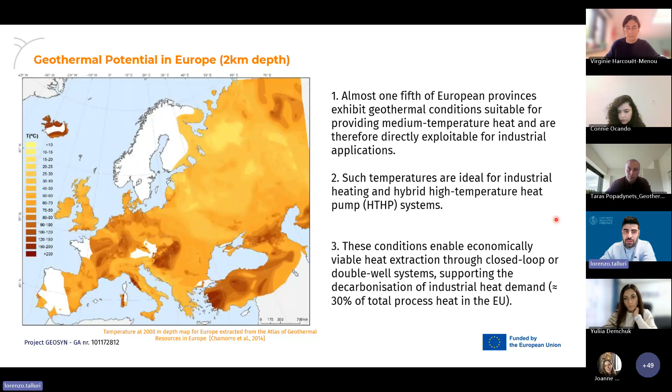Such as high temperature heat pumps - this kind of solution could be economically viable if coupled with new technologies for geothermal exploitation. So we can estimate that industrial demand could partly be satisfied by this kind of solution, and there is lots of industrial potential that could be exploited.

We can see in the literature lots of works, like the ones from Wolf and Blesch or Kosmadakis and Marina, that estimate the petajoules of energy consumption from thermal processes lower than 100 degrees Celsius, or in the range between 100 and 200 degrees Celsius, which are the ones that could be directly sourced by geothermal energy or upgraded thanks to a high temperature heat pump.

Indeed, there could be a nice sector coupling between geothermal energy and industrial processes. Particularly, there are lots of industries such as paper, food and beverages, and chemicals that require temperatures between 80 to 200 degrees Celsius. This could allow the utilization of high temperature heat pumps or normal heat pumps as a key technology for enabling next generation and fossil fuel decarbonization.

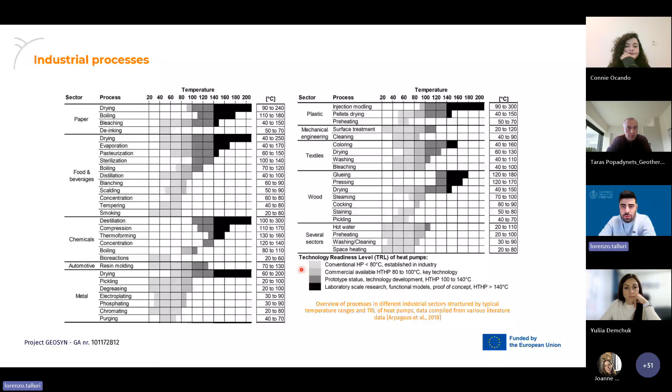This is what we want to try to solve, or at least to think about, in the GeoSyn project. The GeoSyn project's aim is to develop an integrated solution that harnesses geothermal energy. Particularly, we have a geothermal source at about 120 degrees Celsius and upgrade it with a high temperature heat pump, and also provide cooling for chilling at about 12 degrees Celsius.

Indeed, in lots of industrial applications there is a need for both heat for thermal processes and cold. For example, in the agri-food sector, the requirement for both heat and cold is very widespread.

As UniFi, we are the scientific coordinator of the project and work package leader for the thermal design of the system, and we are trying to coordinate this innovation within GeoSyn. What we have proposed are two technologies that could either work singularly or simultaneously in order to increase the use of the cascade energy of geothermal energy.

GeoSyn project partners are APRE, Geothermal Ukraine, COSVIG, University of Florence, Ribacol, NeoEco, SDU, and SINTEF. This small consortium is very goal-oriented in order to provide an effective solution.

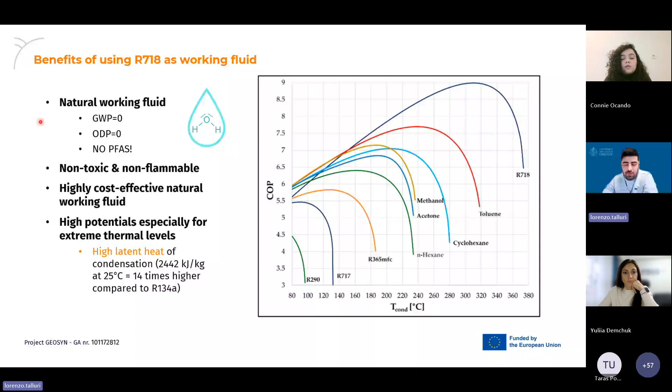Moreover, it has very high potential because, for example, the latent heat of condensation at 25 degrees Celsius is 14 times higher compared to R134A.

Obviously, not all that sparkles is gold, and there are some issues with water, specifically the high specific heat ratio, the very high specific volume of steam, and the normal boiling point of 100 degrees Celsius. These characteristics bring issues that need to be solved: high discharge temperature at the compressor exit, high volumetric flow rates, and compression ratios, especially if we go with a temperature at the evaporator lower than 100 degrees Celsius, which means going into subatmospheric conditions.

So what we needed was to try to have a flexible configuration where we have at the evaporator a temperature of about 120 degrees Celsius, and indeed we have steam entering the cheese factory, which is our case study, at about 130 degrees Celsius. We have already placed a monitoring system at the demo site, so we know the conditions of temperature and pressure.

The goal was to develop a heat pump with a condenser duty of 50 kilowatts, a temperature lift of at least 80 Kelvin, and a supply steam temperature of at least 180-200 degrees Celsius.

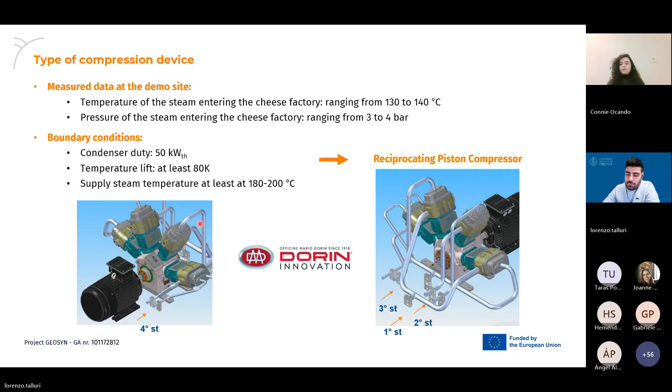And then the solution implemented: there will be a high temperature heat pump with 4 stages. We have the condenser, internal heat exchangers, and the evaporator. We also have a receiver for the flexibility of the system.

We can see that with this solution, we could reach, at least theoretically, a coefficient of performance, with a temperature lift of 80 Kelvin from 120 to 200 degrees Celsius, of 3.6, which is well above the target we set during the proposal writing.

This is just one piece of GeoSyn. The other piece is about the ejector cycle, which is still innovative and still uses water as working fluid. We provided thermodynamic modeling with several configurations and also a computational fluid dynamic analysis for the ejector that we will be designing and building completely anew for the GeoSyn project.

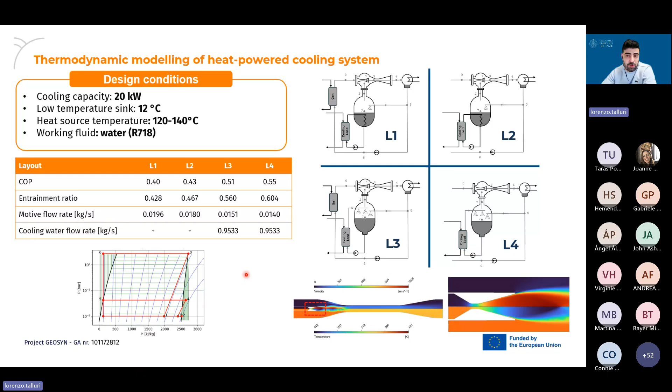Thanks to the calculation of this kind of plant, we will implement this solution: an evaporator where there will be direct injection of the water.

There are two cycles, let's say a motor cycle, where the water is converted into steam and then provided to the ejector, and then the refrigeration cycle, where the cooled part will go to the case studies, basically speaking.

So we have this kind of cycle, one close to a motor cycle and one a refrigeration cycle. The effective coefficient of performance of this solution is about 0.5, which is quite good if we think about heat-powered refrigeration systems.

And then we have the case studies. We've got a real case study, the San Martino dairy factory, which is very close to the Enel Green Power plant, Nuova San Martino. We have a steam pipeline that provides heat directly to the cheese factory.

We will be able to upgrade this heat and downgrade it to cooling requirements through the innovative GeoSyn solutions. Furthermore, thanks to the work of the whole consortium, we also found several case studies where the application of the high temperature heat pump, but also the cooling system, could be exploited, like in food and beverage, pulp and paper, and textile industries, and we can see the level of heat temperature required that could be covered by the GeoSyn solution.

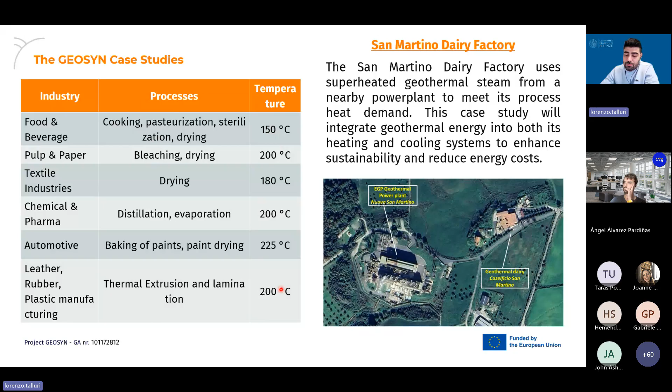So I want to draw my conclusions. Particularly, GeoSyn tries to demonstrate the viability of medium-grade geothermal heat in order to provide both heating and cooling for industry.

The innovative part is the utilization of R718 water as working fluid, both for the high temperature heat pump and for the cooling cycle, which are totally heat-driven. Both technologies are showing potential for coupling with the industrial sector and are especially effective where concurrent heating and cooling are present.

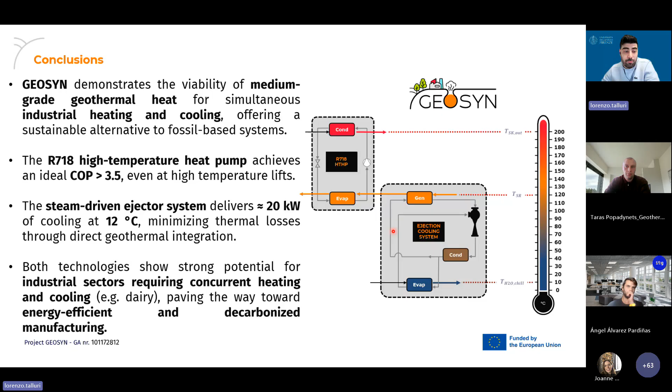So, paving the way to an energy efficient and decarbonized manufacturing.

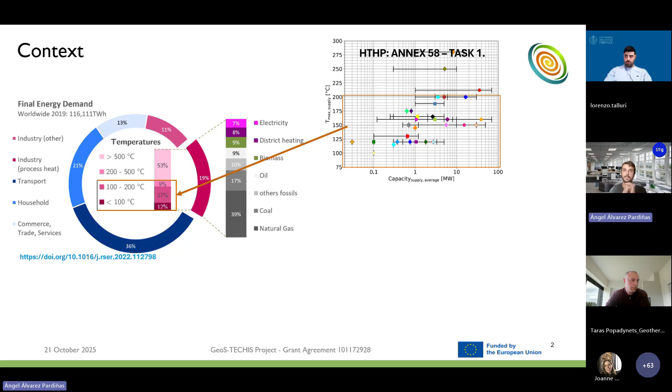And as already discussed today, high temperature heat pumps appear and are developing as a very promising technology to meet these thermal demands at temperatures below 200 degrees Celsius. There are already systems in the market, and it's a very much developing technology these days. However, to make these heat pumps for industrial processes as efficient as possible, we need a heat source that is reliable but also at sufficient temperature.

And geothermal resources in the range of, let's say, 100 degrees Celsius could make a good opportunity for this, and they could be more widespread than the conventional uses of geothermal energy for electricity production nowadays. And this is the context that powers GeoS-TECHIS. GeoS-TECHIS is an EU-funded project with the focus of decarbonizing industrial thermal processes with geothermal energy and other technologies that have been or are being developed around geothermal energy. We are 10 partners plus one affiliated, spread all around Europe and working collaboratively in this project.

So basically, the general picture is not very different from Geosyn, in that we are building on this binomial of geothermal energy at the low-medium temperature range, around 100 degrees Celsius, and developing technologies to meet heating and cooling for industrial demands. Of course, to bridge this gap, there has to be a thermal system that we will introduce later, and other technologies which allow us to take the most out of this binomial of geothermal energy and the demands we are trying to meet.

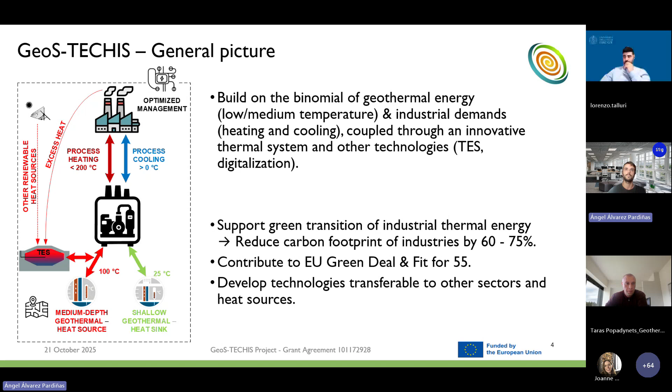So please let me now introduce the 5 specific objectives and innovations within GeoS-TECHIS, which we will delve into later in other presentations, but I will try to introduce them today. First of all, we have what we call the GeoS-TECHIS thermal system. It is the technology that will allow us to bridge the gap between the geothermal heat source we are aiming at, those 100 degrees Celsius, and the process heating at around 200 degrees Celsius and cooling above 0 degrees Celsius we want to meet.

For this, we have a specific presentation today in session 2, which will be given by my colleague Christoph Vanasiak from SINTEF Energy. I really hope you will be present there, and he will introduce the technology further. But the idea is that we will have a system which integrates 2 solutions based on natural refrigerants: a water R718 high temperature heat pump plus a propane ejector cycle, utilizing the low grade heat to produce cooling.

The second of the objectives and innovations within GeoS-TECHIS is to push the limits that currently exist for thermal energy systems, storage systems, and underground thermal energy storage in a way that we can push them further in temperature. Currently, they are basically limited to 90 degrees Celsius or so, according to the literature. We want to bring our contribution to make them more suitable for industrial flexibility.

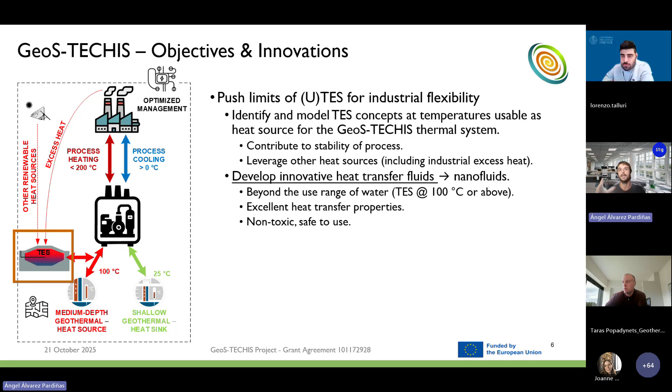It's very interesting to have the right technologies in place, but of course, it's also important to manage them in a right way. And to do so, we are working in a specific work package on supporting the decarbonization of industrial heating and cooling through digitalization and digital tools and technologies. And we are doing it in two different branches. One of them is to optimize energy management.

And we optimize energy management with the development of an industrial Internet of Things platform coupled with hybrid digital twins, which allows us to visualize, store, and operate according to the data we are retrieving from the industry. So we are retrieving those data, we are able to make predictions and forecasts of how the system should work in order to make the optimal use of energy we have available in our system.

And the other line we are working in is to make the knowledge we are getting from the project usable for other industries, providing what we call the decarbonization potential evaluation tool. So in principle, any industrial user could bring us their data, and we encourage you to do it actually, data on their demands, temperature profiles, when this happens, where they are located, which are the current systems they have, so that we can use this data in our decarbonization potential evaluation tool and provide what we call decarbonization roadmaps or decarbonization strategies.

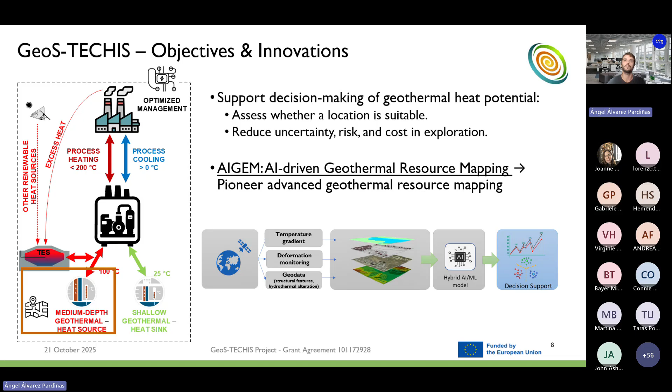And last but not least, the fifth of our objectives. There are a lot of misconceptions around geothermal energy and geothermal supported energy systems, and GeoS-TECHIS is trying to promote the knowledge and acceptability of these systems. First, by properly assessing the environmental and societal impacts they actually have.

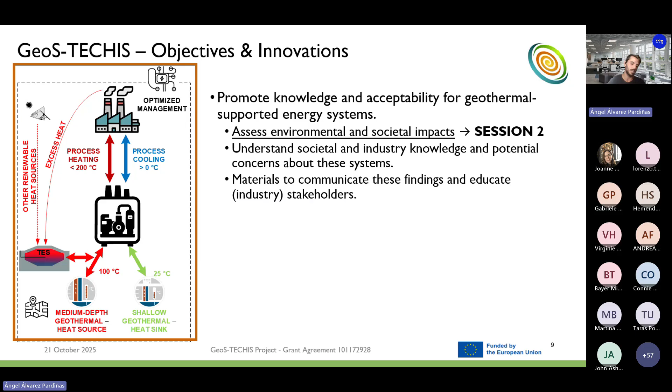And we have in session 2 today a presentation which will be held by our colleagues in Leitat, in Catalonia, Spain, around this topic. So I will not disclose too much right now, but the idea is to be able to actually assess what is happening in this kind of systems, to understand also the actual knowledge of society and industry on the potential of these systems. And in the end, we will provide in GeoS-TECHIS materials to communicate our findings and educate industry or stakeholders around the topic.

And last, I would like to introduce the company which is our partner and which makes everything possible in the end. It's allowing us to validate all these technologies and developments: Kauman, a partner of our project. They manufacture conveyor belts and power transmission belts. They are located in Galicia, in northwest Spain, above Portugal. And it's the perfect example of industry combining heating and cooling demands at the temperature levels we are aiming at here at GeoS-TECHIS.

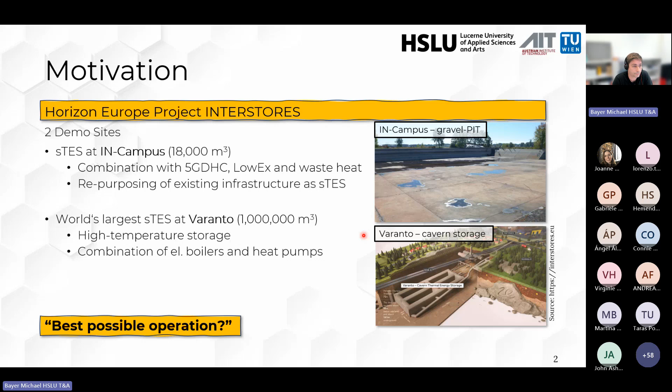One aspect for us at HSLU was the development of a reduced order model in Modelica, which is both fast and accurate, so it can be used for system simulations in a real environment. The issue was that we don't have measurement data yet, so we had to come up with a process to create this ROM. Therefore, we used a validated COMSOL model created by AIT, one of the project partners. It's rather detailed and quite computationally intensive, and therefore impractical for real-time system simulation. To address this, we created the reduced order model in Modelica.

So how did we proceed? We defined similar input parameters and boundary conditions, which were fed into the COMSOL Multiphysics model, which then created results. In parallel, we created the reduced order model in Modelica and did the calibration process in order to match the results from COMSOL and have something fast, which is suitable for digital twinning.

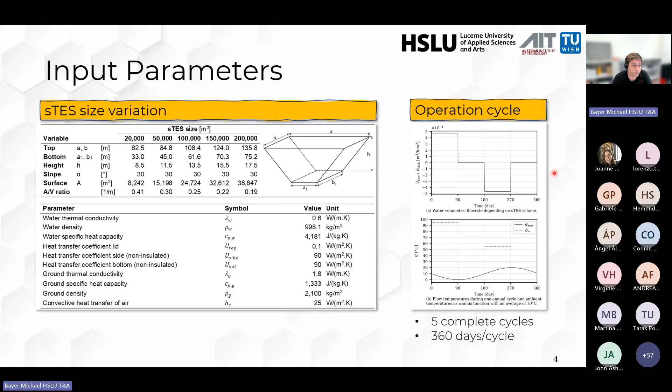This is the reduced order model we created within Modelica. It mainly consists of 3 components: the stratified tank model, the buoyancy model, and the ground model. Both the stratified tank and the buoyancy model were based on the Buildings library, and we made strong modifications, first to represent the proper shapes, in this study the truncated pyramid, but the model can represent cones, pyramids, cylinders, basically all kinds of shapes.

We used equidistant discretization. For the study, we used 200 layers within the tank, and you're able to connect basically each layer of the tank with inflow and outflow connections. Then for the ground model, we created a 2D grid with the finite volume method, where each element is represented by a 4R1C network to simulate the interactions between the ground and the tank.

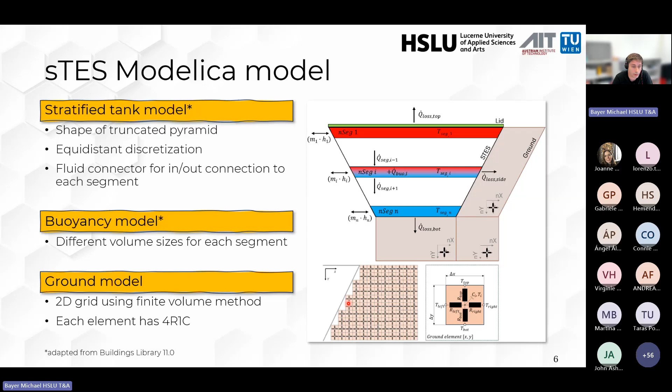For large tanks, the side losses are roughly 50% of the total losses, and for smaller tanks those increase up to 66% due to the higher surface to volume ratio. Bottom losses in total are the smallest contribution, overall ranging between 7 and 9% of the total losses. Even though we have slight disagreements, the overall alignment between the Modelica model and the COMSOL results stays in an acceptable range, somewhere between 1% and minus 2.5%.

Here you can see the temperature profiles for the different sizes from 20,000 to 200,000, representing 5 relative heights within the storage. So 95% is the layer close to the lid, and 5% represents close to the bottom of the storage. You can see quite close alignment, especially during constant conditions, but as soon as dynamic events occur, the temperature profiles from the 2 models show minor deviations.

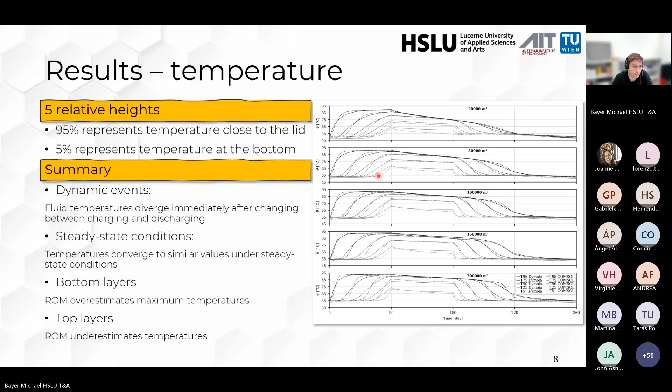Although there is still slight room for improvement, for example, in extreme cases when the tank is very small or very big. What's also to mention here, the best performer is the 100,000 cubic meter storage, but this is because we started with this one and all the calibration and validation was done with it, and then we scaled it up and scaled it down.

If we take a look at the energy balance, you can see that the Modelica model consistently underestimates both the charged and the discharged energy compared to COMSOL by roughly 5%. But this is also mainly due to temperature evaluation inside the tank. Smaller storages have a higher surface to volume ratio, and in these cases, the thermal losses are more dominant and the stratification is less important.

But larger systems have stronger thermal gradients and stronger stratification, especially near the inlets and the tank bottom. The COMSOL model captures those behaviors by using a fine mesh and fully coupled physics. But the reduced order model employs a simplified layer-based structure and buoyancy treatment. So as a result, small temperature mismatches can accumulate into more noticeable deviations as the simulation time gets longer.

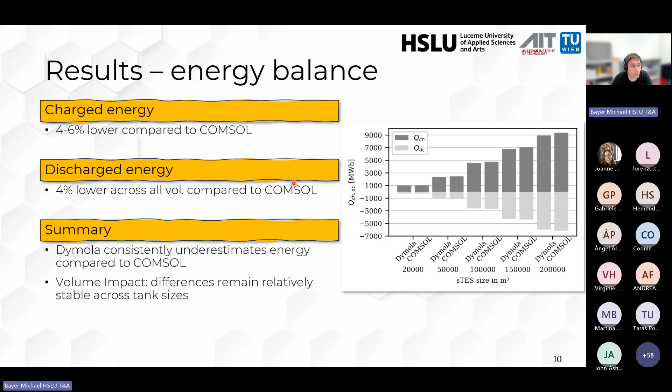For the computational time, you can see the comparison between Dymola and COMSOL. We optimized the reduced order model by calibrating the segment count based on convergence tests to ensure a stable stratification without excessive runtime. In COMSOL Multiphysics, there is a direct fully coupled approach with adaptive mesh refinement and use of the MUMPS solver.

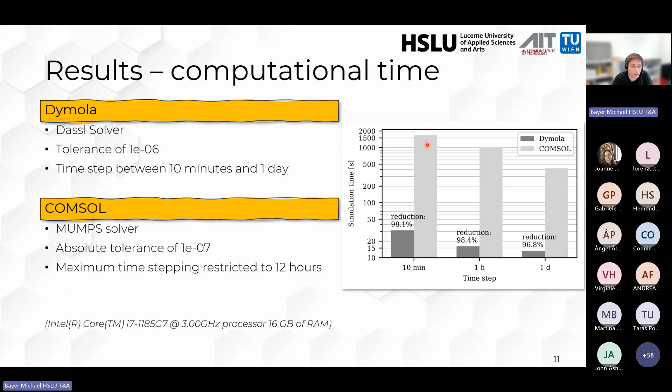And in Dymola, we used the DASSL solver, and we ranged time steps between 10 minutes and 1 day. For both, we used the same machine, and we were able to reduce the simulation time by up to 98%.

Which already brings me to the conclusion. The reduced order model has demonstrated strong performance, achieving deviations of less than 2% in temperature simulation. During the calibration against COMSOL simulation, the model was highly efficient, and we were able to complete a full year simulation in roughly 4 seconds. If we simulate something like Dronninglund, which is highly complex, then it increases, but for an annual simulation of Dronninglund we still manage with roughly 1 minute simulation time.

What are we now planning to do? First of all, we already did the FMU export, and we are about to perform some parameter calibration with FMPy. Additionally, we will work on different storage media, for example, the gravel water mix. Also ongoing is model refactoring, so we can make it accessible to other people and more usable. The ultimate goal is to implement this in an MPC and install it on one or both of the demo sites once they start operating.

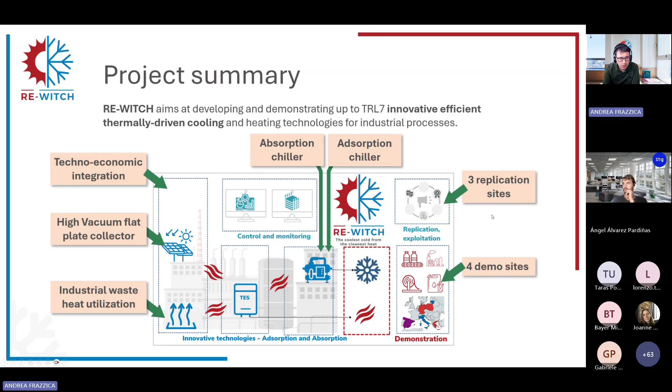So we have 3 different technologies working in parallel in this development phase that will be able to provide cooling to different industrial applications. More specifically, we'll have 4 demo sites covering different industrial processes, from the most standard ones, usually food and beverage, up to innovative industrial processes, at least from the cooling point of view, which are biorefineries and the pulp and paper sector. And we'll also further replicate this investigation through modeled demo sites in 3 different replication sites.

So, as mentioned, the core of the project is the development of innovative sorption processes for cooling applications. In particular, we have 3 different technologies currently under development. The first one is an innovative adsorption technology. Adsorption means that the sorption process happens thanks to the use of solid sorbent media, in this case silica gel. But the main innovation is related to the patented solution proposed by the German company Sorption Technologies, in which they try to reduce the number of components by having the adsorbent reactor integrated with the evaporator and condenser inside the reactor itself, minimizing the number of heat exchangers and exploiting direct evaporation and condensation inside the reactor.

And this solution is also conceived as stackable as possible. So in a modular way, you can see here, for example, a system consisting of 3 modules working in parallel. So you can, in principle, increase the cooling capacity that you want to install by stacking more modules together. The other 2 technologies belong to absorption. In this case, from the physical process, the main difference is that the absorbent material is a liquid solution. In our case, for both technologies, we are using lithium bromide solution as an absorber.

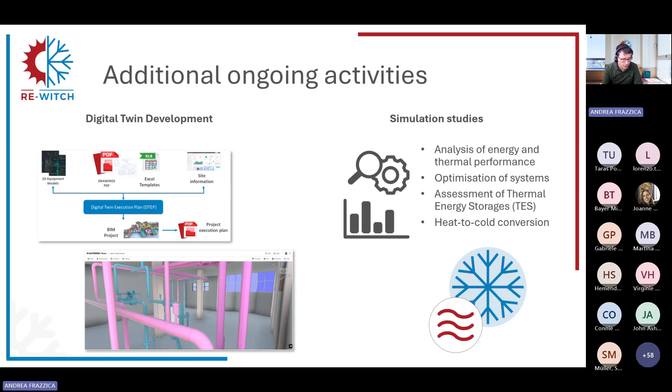And then we have two other plants belonging to industrial processes that are usually not so considered in cooling processes: a biomass and biofuel refinery in Greece, Miloil, and a pulp and paper company in Italy, ICP.

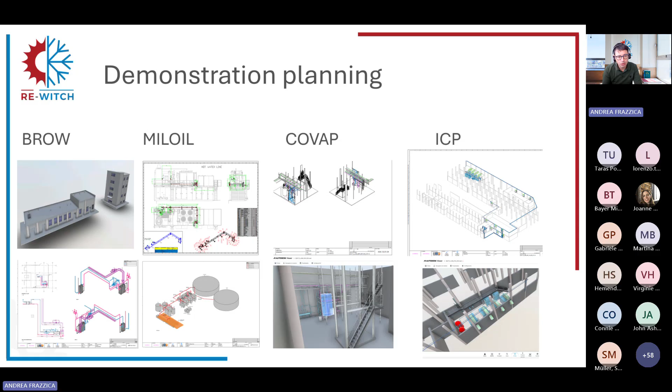Here's quickly an overview of the current status of the different digital twinning we are developing for the four demo sites. We are now working on the current configuration, trying to model all the sections of the plants interested by the ReWitch integration. Next steps will be to profit from this preliminary digital twinning to derive the designing phase of each demo site.

So what's next? As mentioned, we are now in the manufacturing phase of the first prototypes. This will be ready probably by the end of this year, and then early 2026 we will start the testing campaign in the lab infrastructures that are part of the project, in order to finalize the design and optimize the operation of the technologies.

We are now working on the cloud-based monitoring system that will be installed in all the demo sites to start the data collection for the baseline analysis, which will last for the entire 2026.

And as mentioned, we are finalizing the design of the demo sites. We expect to have the design finalized by the first months of 2026, to move on with procurement and installation of the equipment in all the demo sites until the end of 2026, in order to be ready to receive all the technologies on site and install them to start the final year of the project, which will be mostly dedicated to monitoring the technologies' operation.

As introduction, we will have a short look at thermal source networks in general. Afterwards, we will already dive into the specifics with a system description, and I also brought some examples about the envisaged operation, first monitoring results, and one exemplary planning step.

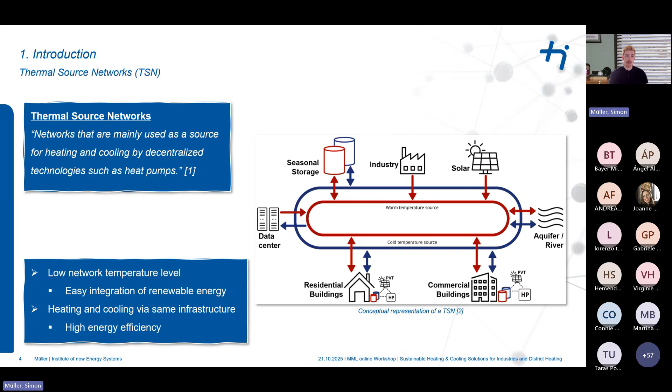With those two aspects of TSN, you can already see that they can help move to a more climate-friendly future. Today we're going to look at a system which can be seen in some parts as a modern benchmark of those TSNs, in terms of retrofitting industrial areas, multi-source and multi-storage integration, and modularity and adaptability.

The TSN I'm referring to is called the InCampus, and the InCampus is a planned 75-hectare industrial park, which will consist of up to 70 non-residential buildings. The area of this project is situated in Ingolstadt, Germany.

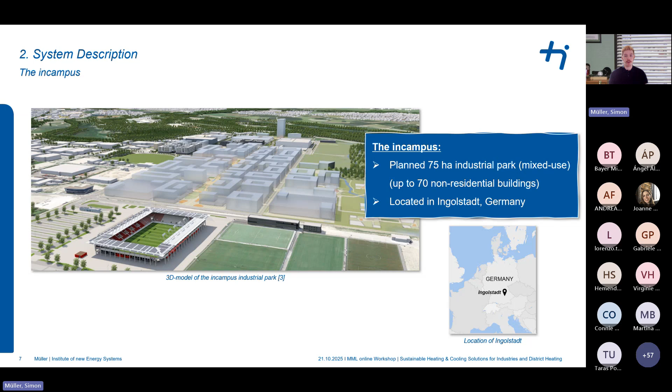But before I show you some recent information about the InCampus and the related energy system, I want to have a quick look back in time and see what was happening at the InCampus before.

Until 2008, the area we're talking about was occupied by a refinery, which started operation back in 1965, and sometime after the refinery shut down, the area was sold for €1 symbolic to the city of Ingolstadt and Audi, which is also located with its headquarters in Ingolstadt. Both partners agreed to a plan to refurbish the area into an open technology park, and now we can already see that path from the old refinery site towards this new TSN system called the InCampus.

All of that process started with a soil remediation process to get rid of all the contamination left from the operation of the refinery. 90% of the washed soil was again used on site, for example, for land leveling.

Next to that, there are also groundwater wells, which keep the remaining contaminants from being washed away, and those can also be used as a thermal source or sink for the TSN, which you will also see later on.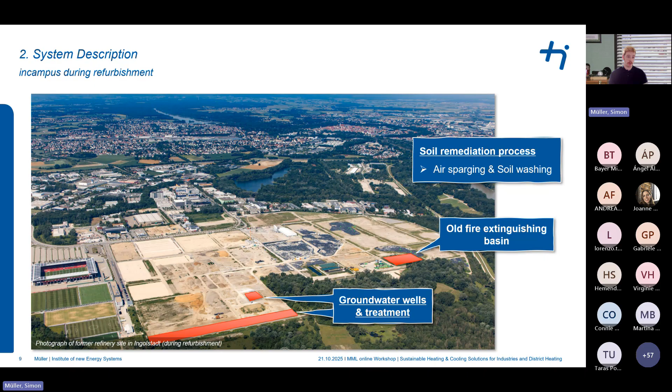Now that we're all cleaned up, we can start with the current state. Currently, the InCampus is still under development. Overall, there are four construction phases planned to develop the whole area, but since September 2023, the first four buildings of construction phase 1, which you can see here, went into operation and were connected to the TSN. The TSN infrastructure itself, on the other hand, is already installed — pipes equipped for the following construction phases. It just needs new buildings to connect to it.

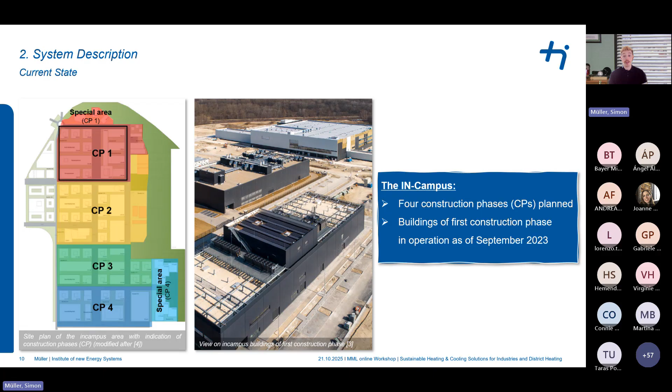And now we will have a closer look at the envisaged operation of the buildings and networks in construction phase 1. There are 12 buildings planned for construction phase 1, some office buildings, a security center where security features of cars are tested, and a data center, which has significant waste heat potential.

There is something which can be called balanced demand. This is the case when one building connected to the network has a heating demand and another building, because of its function or utilization, has a cooling demand at the same time. So at the end of October, for example, the data center with its cooling demand will eject heat into the network via heat exchanger, and on the other end of the network, some office buildings with heating demands will extract some heat via heat pumps. So instead of fulfilling the demands separately, the demands are balanced in the TSN.

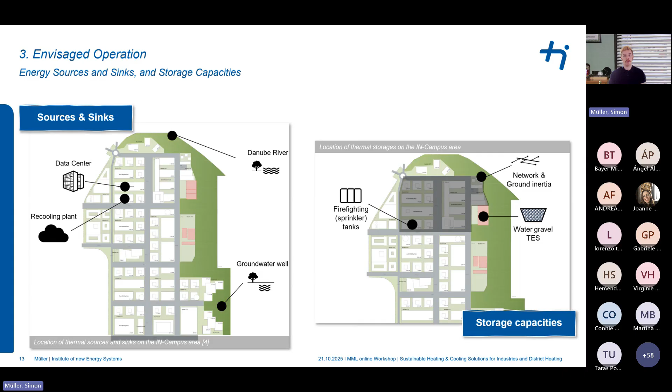And now we bring all of these components together, and we can understand the envisaged operation. In the center, there's the TSN, which connects all the different components of the energy system. During winter, the buildings have a dominating heating demand, which is to some extent balanced by the waste heat from the data center. Additional heat supply can come from the thermal sources or discharging the S-TES.

Now, during summer, the demands of the buildings change, and most of them will have a cooling demand, or you could also say they supply exhaust heat to the network. The waste heat from the data center does not really help with that, but adds even more heat to the network. Accordingly, all the surplus heat is either charged into the S-TES, which is just another way of saying there is cold discharge from the S-TES,

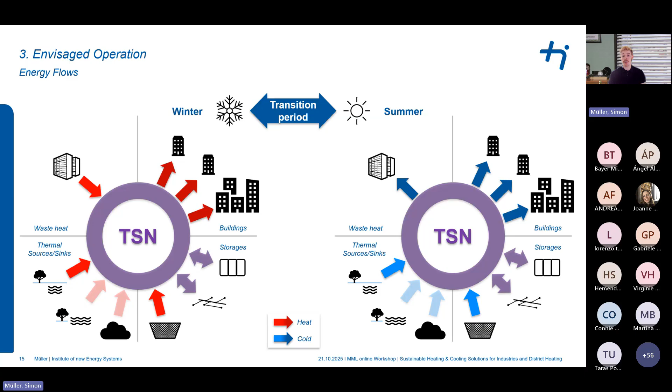or the surplus heat is discharged to the displayed heat sinks. That means, for example, groundwater wells or the Danube are providing cooling energy, and that is why the blue arrow is directed towards the system.

Before, I mentioned that 4 buildings of construction phase 1 went into operation 2 years ago now, and for those I can present some monitoring results starting in July 2023. You can see the summed up cooling demand of the buildings in dark blue. Right next to that, you can also see the cooling energy supplied by the groundwater wells in light blue. You might recognize that the light blue bar of the supply is a little higher than the dark blue bar of the demand. This is because there are some cooling losses to the ground in these months.

In May, you can see more extreme behavior, which is related to the temperature level of the network and the ground. Starting from October onwards, you can also see the summed up heating demands of the buildings in dark red, and next to that in light red, the heat which was supplied by the waste heat of the data center. And although the network temperature of the TSN is kept around 15 degrees Celsius in winter, there are still some heat losses to the surrounding ground. But as you can see, groundwater and waste heat can supply the necessary thermal energy for the current system.

And that is as far as I would like to go about the monitoring today.

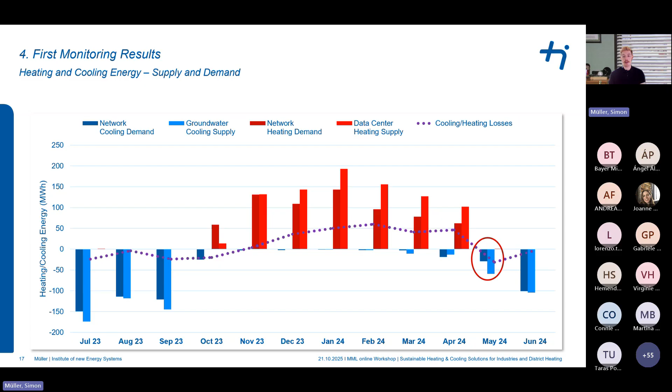Yeah, but I brought some more insights into the technical project planning of the in-campus from reviewing the overall documentation of the project. The 5 main phases of the technical project development on the left were derived, and because I do not have the time to go into all the chapters in detail, I brought one exemplary planning step, which is the comparison of different network types.

There, the planning committee had a look at 1, 2, or 3 pipe systems and compared them to each other in different categories, more than are shown here. One of the highly weighted categories was energy efficiency, and it was correctly identified that a unidirectional 2-pipe system has some shortcomings compared to a bidirectional 2-pipe system in this regard.

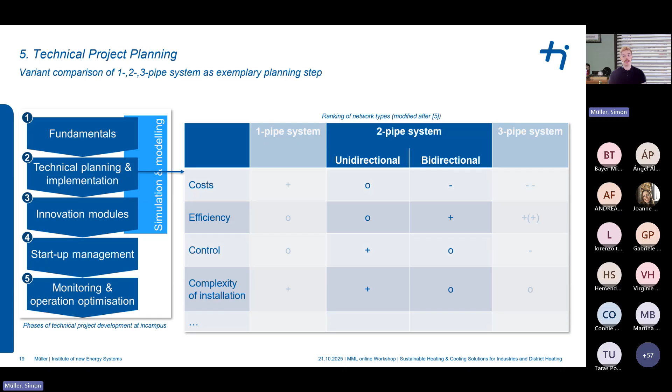But from the point of view of the planning committee, the point was outweighed by the complexity of the control and complexity of the installation of the system itself. So therefore, it was decided to operate this system as a unidirectional 2-pipe system.

Now we've seen a brief overview of the in-campus energy system, and in some details we were able to grasp maybe the benchmark properties of it. Originating from a former refinery site, the in-campus presented itself as a benchmark in terms of retrofitting. With the planned operation, we could see the multiple sources and multiple storages that are already included or will be included.

And from the first monitoring results, we saw the system's operation in partial load now, but even more important, the energy system planning that considers the modular expansion and the integration of many more industrial demands in the future. And accordingly, future research will be oriented at maybe transferability of the system. And the first step in this regard is to analyze the planning process, which we did.

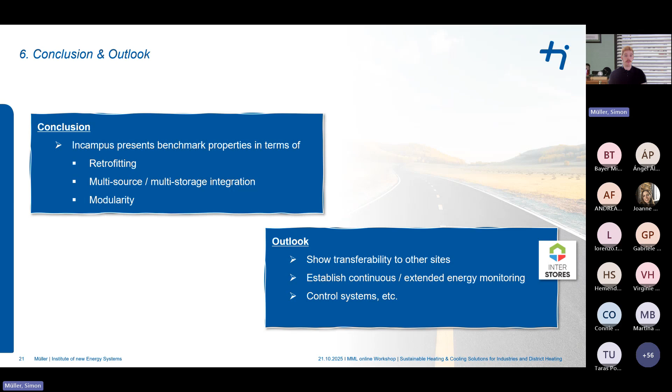So we have more steps ahead. Establish the energy monitoring to have a continuous report, not just once, and also go more in the direction of control systems, including the seasonal thermal energy storage, and maybe starting to have an MPC at the in-campus.

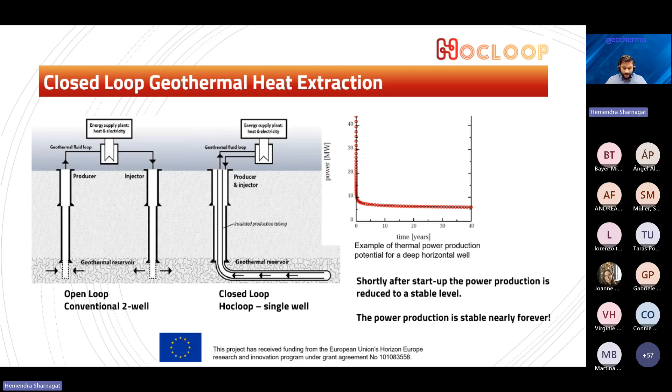So the next slide you can see here also, this is the graph generated based on the computer model and prepared by IFE. So in the long term, the graph shows a time span of 40 years, but once it stabilizes the level, it can maybe go forever, I can say, or at least 100 years. That's what we are looking at with this solution.

And in this closed loop project, the technology we have used is dual vacuum insulated tubes. So the very important aspect of this project is the technology we are using, the dual vac. So this is the vacuum chamber or annulus, we can say, which can protect or minimize the heat loss. And that's what you can see on my right hand side.

These are the tubes we have used for this project. So it can minimize the thermal loss on the fluid. And it's continuous vacuuming along the whole tubing in the well.

In the next slide, you can see we have done the full scale test in Ullrigg Test Center in Stavanger. So approximately around 650 meters of dual pipe we have used to perform this pilot test. Also, it verified the heat flow model by thermal response test.

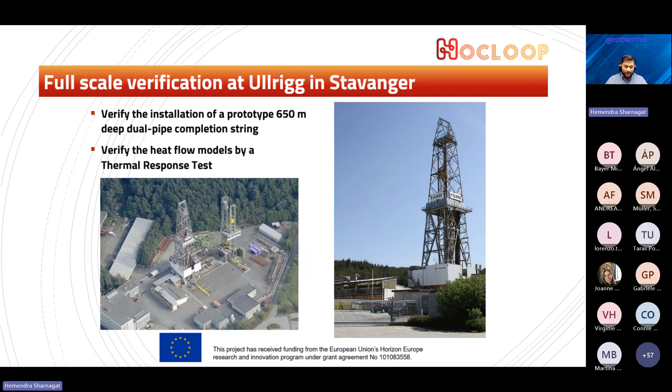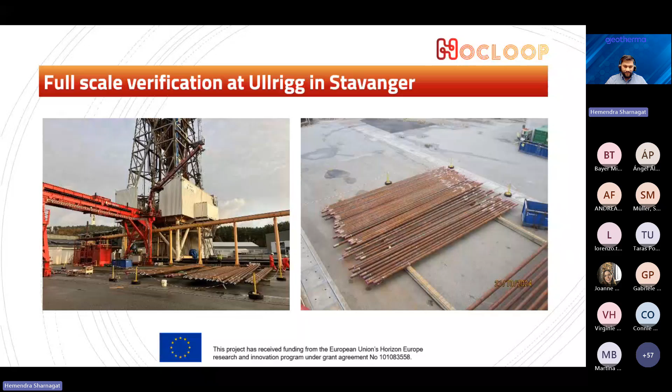Next slide, you can see also the picture from the site. You can see all the laying down of all the dual vac pipe. We also called it DHS, dual heat string. So that's the name we have given these pipes. And some more pictures from the original site.

So here is the conclusion. The model for heat flow has been verified, and also we are improving the heat flow model, and IFE is working on that. Also we have done this full scale test at Ullrigg, and are currently evaluating the potential sites.

And further work, we want to also use alternative fluid options, which can improve the performance, and it can also increase the power by new well construction. And as I already mentioned, with this portability, this solution can be used in any location where there are potentials. So it's a very short presentation,

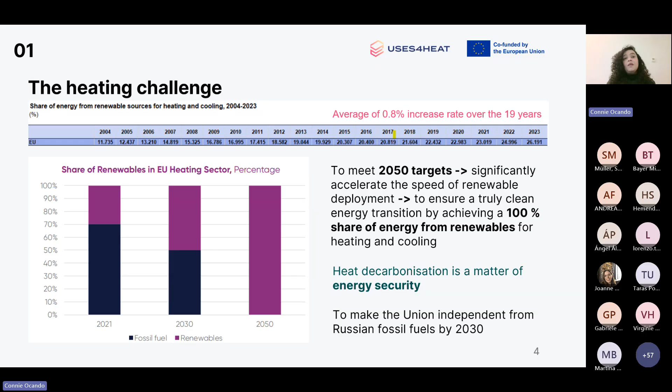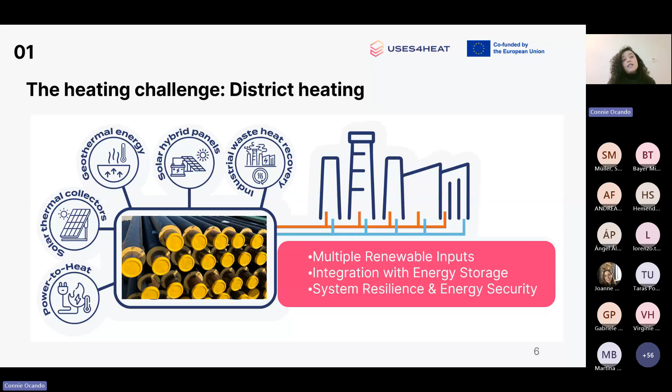And this is where district heating comes in. District heating is a centralized system that distributes heat to multiple buildings. So it is a key technology for decarbonizing our heat systems. And why? Because district heating allows for multiple renewable inputs and also allows the integration of energy storage and, of course, improves the system resilience.

That is a technology that stores heat or cold for later use. For example, capturing excess heat in summer to use it during winter. So this technology helps district heating systems operate more efficiently and enables better integration of renewable energy sources by balancing the mismatch between energy supply and demand.

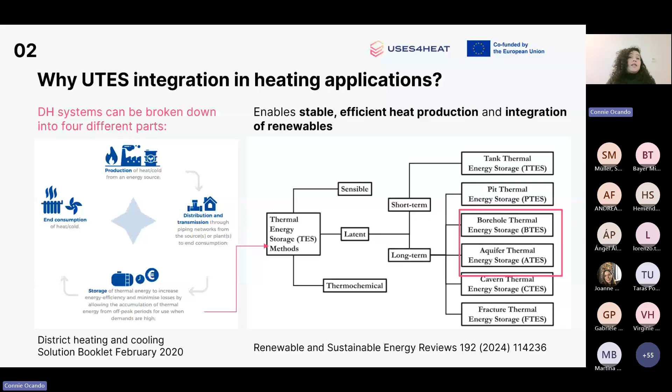This technology stores heat in underground rock or soil. It uses vertical boreholes with U-tube heat exchangers carrying heat transfer fluid. The efficiency of this technology depends on the borehole design, the pipe material, and the thermal conductivity. This technology shows easy scalability and limited geological requirements that make it highly appropriate for large-scale installation.

Then we have aquifer thermal energy storage. This technology stores heat in groundwater within porous aquifers, and the heat is accessed via drilled wells into the aquifer. This technology is restricted to a few locations due to the geological conditions and limited drilling capabilities.

So here, USES4HEAT is demonstrating 5 key technologies to enable cost-efficient, optimized seasonal storage heating. First, we are developing advanced aquifer thermal energy storage drilling equipment with remotely controlled machines. We are also developing innovative high-temperature groundwater heat pumps connected to aquifer thermal energy storage and, of course, to district heating networks. We are also developing highly efficient and cost-effective solar thermal collectors.

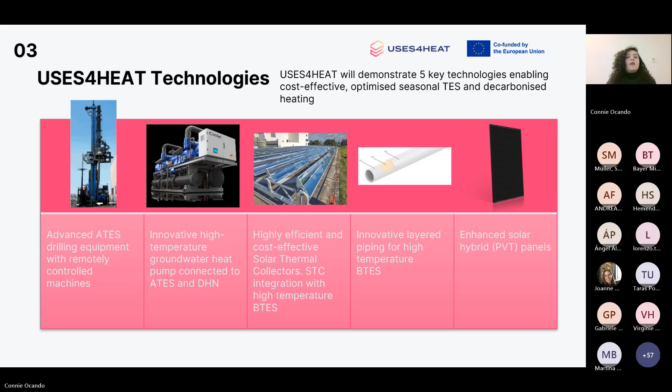Of course, this will be integrated with high-temperature borehole thermal storage, and also innovative layered piping for high-temperature boreholes. And we are also developing enhanced solar hybrid PVT panels. We have assessed the viability of these 5 technologies at 2 demo sites in Italy and Norway.

In Italy, the demo site is Riva del Garda. The drilling unit manufacturing is nearly complete. Also the PVT absorbers were tested and the groundwater heat pump components were defined. Nevertheless, we encountered some issues because of the lack of regulatory frameworks in Italy and, of course, the limited geological knowledge.

At the demo site of Førset in Oslo, Norway, we have successfully tested the pipes and the solar thermal collector integration. In this case, we encountered some issues because of the investment portfolio shift of the company. Due to this, we have had to implement some mitigation measures, and we have identified 2 new demo sites, because the previous demo sites in Riva del Garda and Førset will no longer continue in the project.

As I said, we have 2 new demo sites that offer comparable operational, geological, hydrological, and energetic conditions, and we are pending approval from the European Commission, and we expect a positive decision by the end of the year. I wanted to highlight this to show you the barriers that these new technologies can confront during the development of these kinds of projects.

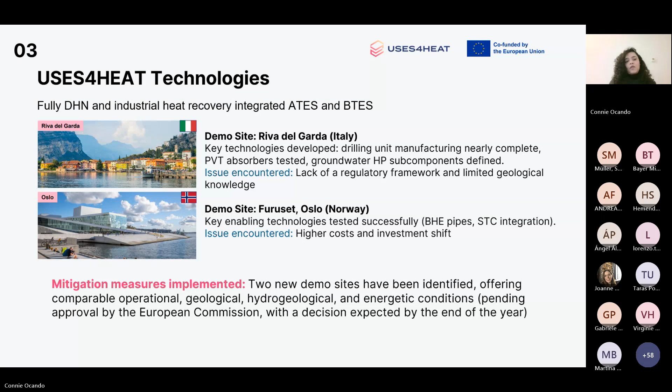So in conclusion, what we expect from USES4HEAT is to increase the availability, robustness, and safety of sustainable and efficient choices for energy storage, to increase security of supply, reduce energy loss, improve cost effectiveness, and improve the environmental footprint of the energy system. We expect to increase the technology leadership, competitiveness, and technology export potential of the European storage technology industry. We expect to enhance the sustainability of storage technology, taking fully into account circular economy, social, economic, and environmental aspects in line with the European Green Deal priorities.

Also, USES4HEAT will not only demonstrate underground thermal energy storage, but also different technologies like solar thermal collectors and groundwater heat pumps, which will enable the exploitation of different heat sources like solar thermal energy, geothermal energy, industrial waste heat, and hybrid solar panels. These heat sources will be fully integrated and connected to the thermal energy storage units, demonstrating the suitability of this technology to accumulate various heat streams, further maximizing the flexibility of the sector and its decarbonization. So thank you very much, and this is all from my side.

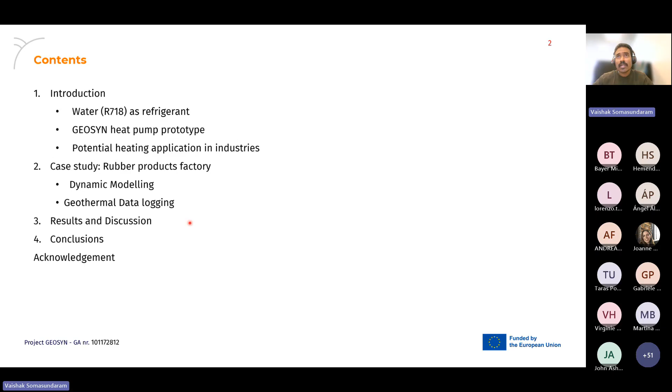My colleague Lorenzo has already given an introduction to our project, which is GEOSYN. So our objective is to integrate a geothermal source having temperatures in the range of 140 degrees centigrade to a heat pump as well as a heat powered refrigeration system. By heat pump, we are mainly focusing on high temperature heat pumps.

However, these advantages of water come with some limitations or challenges also. That is, water exhibits high pressure ratios as well as high discharge temperatures. In addition, it has low volumetric heating capacity, which means the compressors used for this application are bulky, and also the other components. In addition to these two limitations, if our heat source temperature is less than 100 degrees centigrade, the evaporator of the heat pump will operate in vacuum, which will cause additional challenges for the heat pump.

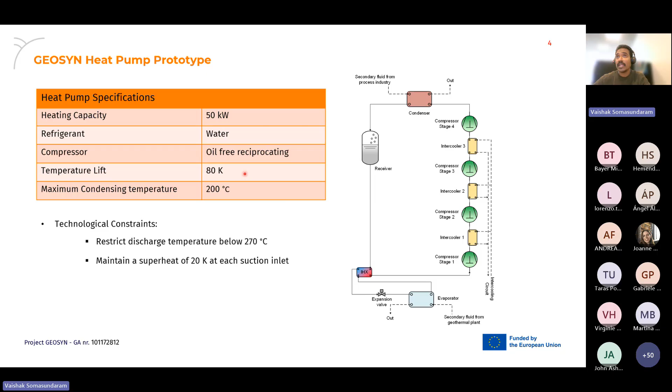So the heat pump we are developing is targeted for applications where the temperature varies from 180 to 200 degrees centigrade. These applications exist in industries related to food and beverages, textile, paper, chemicals and pharmaceuticals. In addition, industries related to rubber products, plastic, glass manufacturing, etc.

The main working fluid or heat transfer fluid generally used in these industries is steam. In addition, pressurized water and air are also used. However, in some cases, they use thermal oil where accurate temperature control is required. So for the present study, we have selected a case where the heat pump we are developing can be used. That is, we are focusing on a rubber product manufacturing industry.

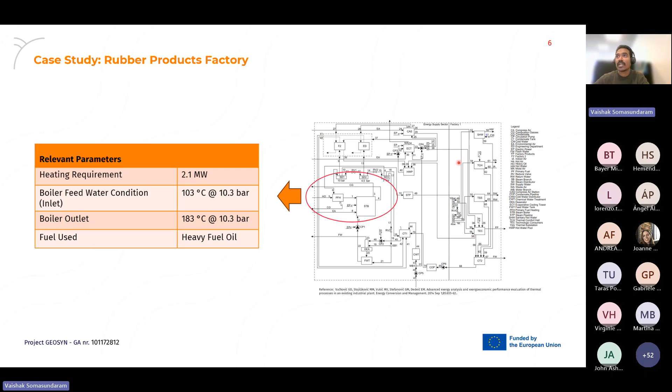In addition, we have implemented the basic control strategies. I want to mention a few control strategies we are using here. One is we are modulating the speed of the compressor according to the required outlet sink temperature. In this specific case, it is 183 degrees centigrade. In addition, the opening of the expansion valve is modulated to control the superheat at the outlet of the evaporator.

Further, there are 3 independent pumps which supply the cooling liquid to the intercoolers, and the flow rate through these intercoolers is also controlled so that we can have a definite superheat at the outlet of each stage of compression, and thereby we can limit the discharge temperature below 270 degrees centigrade.

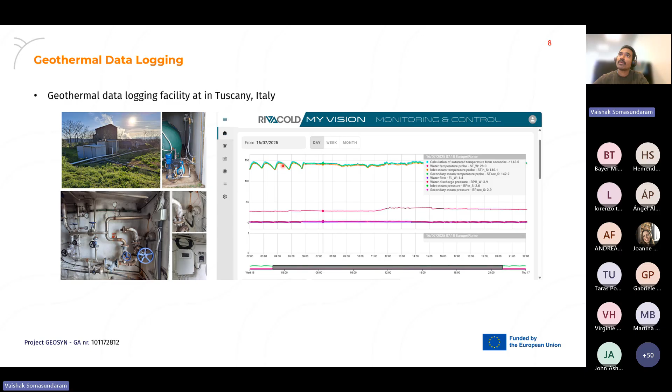However, the condensing temperature, condensing pressure as well as the sink outlet temperature is constant. The objective of the heat pump is that it needs to provide steam at a constant outlet temperature. In this specific case, it is at 183 degrees centigrade.

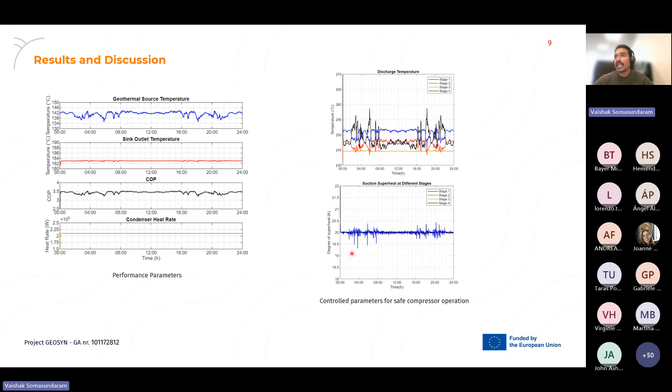When we are comparing the operating cost of the heat pump with that of a boiler, it can be observed for the baseline scenario that we are able to obtain approximately a 60% reduction in the operating cost.

Now, if for the considered electricity profile we even increase the electricity cost by 20 or 40%, still the operating cost of the heat pump will be less than the baseline operating cost of the boiler.

It is very important to note here that currently we have considered a Denmark scenario, which relies mostly on renewable energy sources. However, for countries which rely on natural gas or thermal power plants, the scenario will be different. For example, for countries like Italy, the operating cost of the heat pump will be higher than what we have for Denmark.

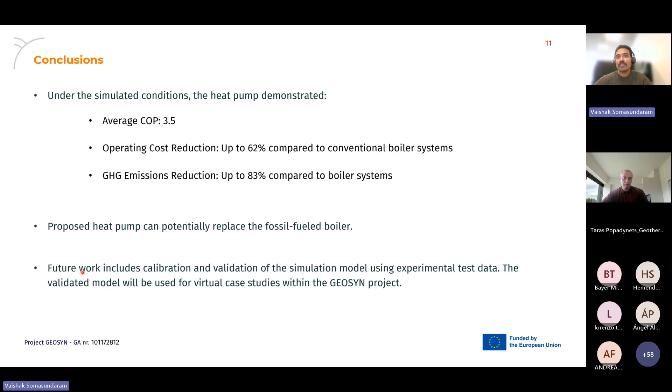And in the further stage, the validated model will be used for further virtual case studies which comes under our project. So we would like to acknowledge the fund received from the Horizon Europe grant. And here we have shown the GEOSYN consortium, which involves 10 partners from different parts of Europe. So that is brief about our project.

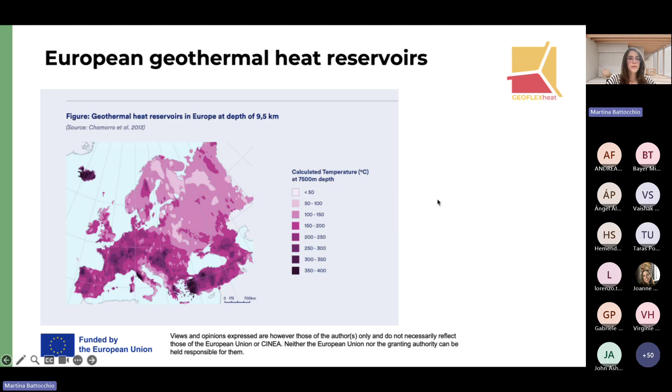So from a policy outlook, I wanted to present what the EU and also national decision makers are doing and what they should do. So the European Commission and the European Union in general are supportive of geothermal energy. But we must not forget that implementation is national. So the countries need to remove the barriers and stimulate themselves what the EU signals are.

For example, countries like Germany are moving to fast-track geothermal permitting and putting in place some scalability templates that will allow anyone who wants to fund or implement a geothermal project, a template that is ready and harmonized. So as I mentioned, what's needed now is to harmonize and make the rules more pragmatic and also target them towards de-risking finance and standardization for industrial applications.

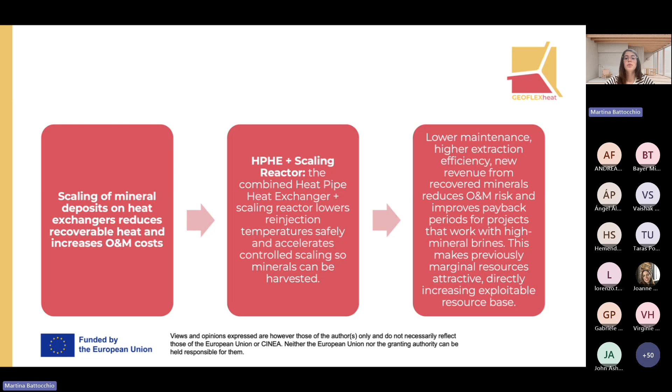The next barrier is permitting fragmentation and the lack of standardized demo data. GeoFlex is doing standardization and policy work to provide standardized, policy-ready documentation and demonstrator data, helping regulators create a harmonized permit procedure and reduce the time to approve industrial replication.

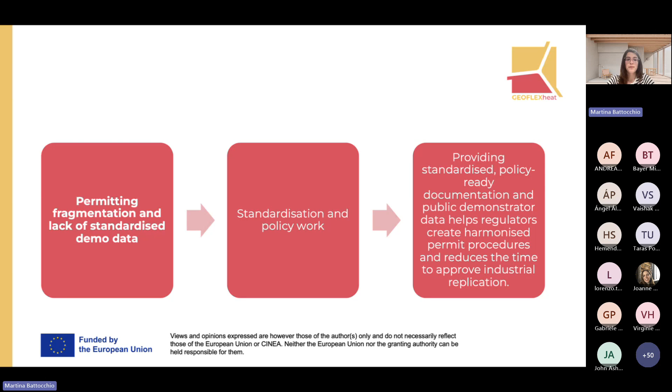So what could be concrete policy asks to policymakers? The first is to implement one-stop permit procedures and fixed review timelines for demonstrators and industrial geothermal.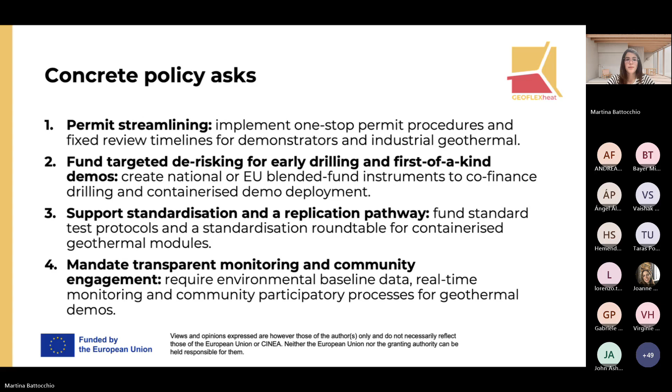As stakeholders, to shape Europe's clean heat future and make our voice heard, we can participate in European Commission calls for evidence and public consultations, and engage through working groups and the Have Your Say platform.

We can provide insights as experts via stakeholder advisory boards in European projects. Most European projects foresee this type of advisory board, and we can also join the Clean Heat Industry Group that connects policy and industry voices.

This is all from my side. If you want to know more about GeoFlexHeat as a project, our goals, or want to participate by being part of our stakeholder advisory board, feel free to reach out to me. You have my contact here, or reach the GeoFlexHeat project coordinator, Professor Hussam Jouhara from Brunel University of London. Thank you very much for your attention.

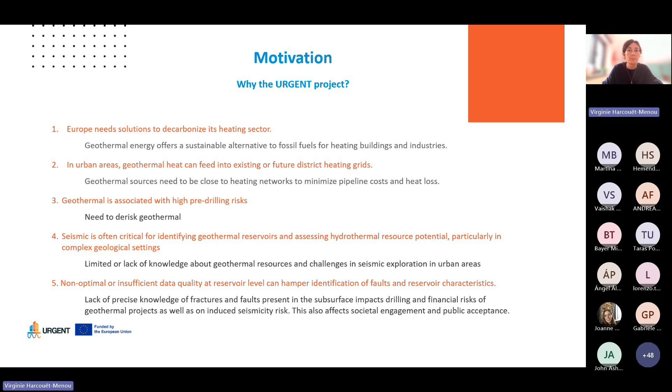Today it won't really be a technical presentation like some of the other projects, but rather an overview of the activities we do in Urgent and why we do them. First of all, we have the objective to develop innovative technologies and workflows for seismic exploration of geothermal resources. But we also have 5 specific objectives.

The first one is linked to innovative acquisition technologies. We want to enable low-impact, affordable, high-quality seismic data acquisition to de-risk geothermal development in key underexplored areas, and by that I also mean urban areas. We also want efficient, faster data analysis to improve reservoir characterization and fault detection to increase drilling success rates.

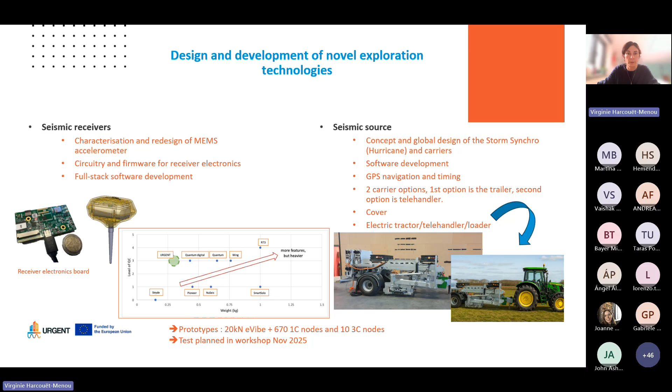Again, here it's just a prototype of what the carrier of the source will look like. It is being manufactured and will be tested together with the nodes beginning of November. At the end of the project, we will have a 20 kilonewton eVibe and around 700 nodes developed. And these will be tested at the 3 test sites.

In addition to that, I said we want to also work on how to optimize survey designs. So what can we do to reduce the exploration cost? What could you optimize in terms of deployment of sensors, of shot points? And for that, we have a partner, RTS, working specifically on these aspects.

So far, they have used data that have been acquired at the VITO site last year, so 3D seismic data, to test some workflows to optimize and to understand how you could reduce, for example, the number of sensors to be deployed. So at this stage, RTS is still finalizing, let's say, the survey design for 2 of the sites, and the VITO site, where we will have a 3D small-scale acquisition, will be finalized a bit later.

But the idea is to have 2 campaigns where we would acquire 2D seismic lines, one in Poland and one in Hungary. One is in a more or less urban context, and the other one is more on a sensitive industrial site where there is a refinery, and we want to prove that the technology developed won't be too impactful. And we want to use compressive sensing and adaptive sampling to enable efficient imaging across the subsurface.

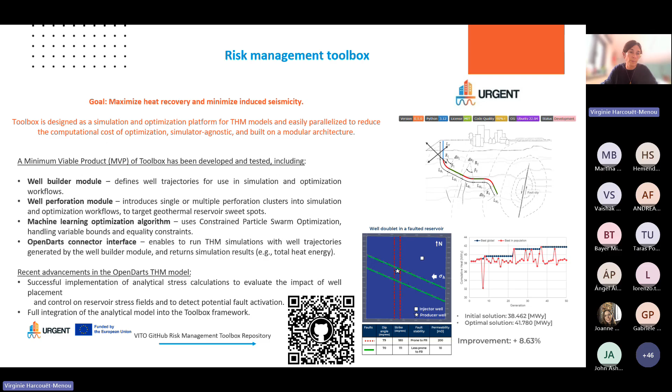So it's thermal hydromechanical models, easily parallelized to reduce the computational costs, simulator agnostic, and built on a modular architecture. So basically what it does, it gives you the best location to position your wells for a given project, knowing the position of faults, for example, telling you what distance you should be from the fault, what would be the optimal position and also architecture of your well in order to have the best outcome in terms of heat, but also to make sure that you would not trigger any seismicity.

And in parallel to that, we have a partner working on the development of AI and ML-driven algorithms for efficient post-processing and improved fault detection. So it's dGB, and they are working mainly on the improvement of the existing OpendTect machine learning software, where they really start from the processed seismic data and help to interpret the data.

And they work mainly on two different projects. They develop an interactive machine learning driven workflow to facilitate interpretation of faults and horizons. And at the same time, they are working on the training of a foundational model to predict faults and horizons via the interactive workflow. At this stage, we are still working on that, so it's ongoing work. But I hope that if there is a next event organized, the partners could even present themselves the status of these different aspects.

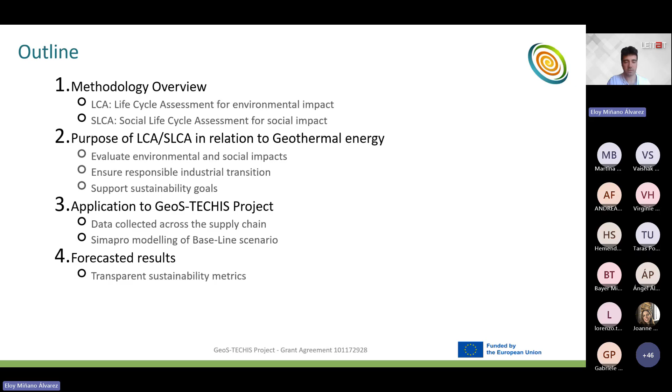So I will explain what a life cycle assessment is, an environmental one, and also what a social life cycle assessment is, giving examples of how it works in a geothermal context. Also, the purpose of the life cycle assessment and the social life cycle assessment in relation to geothermal energy. The third aspect is the application of this life cycle assessment in the GeoS-TECHIS project, how we are collecting the data, and how we're going to conduct the modeling. And finally, I will explain the forecast results.

So the life cycle assessment is a process to assess the environmental impacts of a product or activity over its life cycle. To provide a little bit of context, with the GeoS-TECHIS project that seeks to implement a geothermal system of conveyor belts in a factory, a life cycle assessment of a geothermal system would consider all the environmental impacts associated with this technology, from raw material extraction, manufacturing, processing, transport, distribution, the use of this geothermal system, the maintenance, and the impacts associated with the end of life.

So all these different phases are considered within an environmental life cycle assessment, and they have inputs and outputs such as electricity, materials, or waste. All these inputs and outputs also have environmental impacts, and the results of the environmental life cycle assessment are the final outputs of these impacts. Once the environmental impacts are calculated, it's possible to detect hotspots, which impacts are high or low, and then we develop strategies in order to mitigate these hotspots.

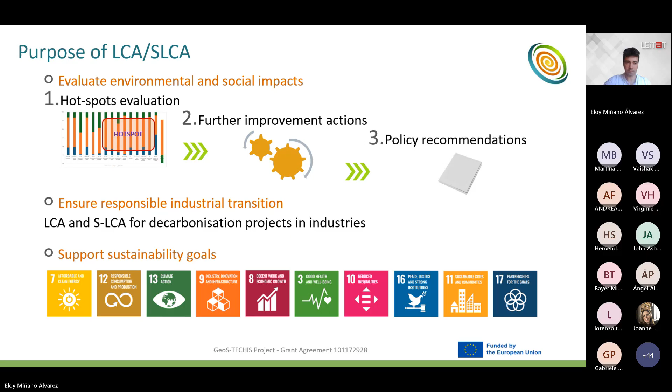So we don't consider the machines, for example, related to the production of conveyor belts. And all these elements related to energy, we evaluate their impacts from raw material extraction until disposal, so all the lifespan. And the analysis is to compare the factory as it is right now to a future GeoS-TECHIS scenario with the geothermal source, to see how the environmental impact changes and if it is a positive thing to implement this geothermal system.

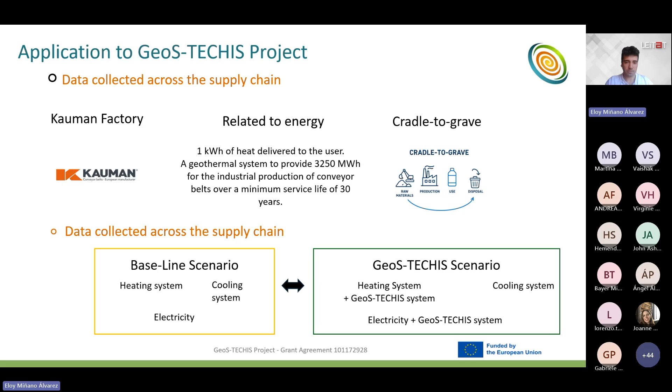For the moment, we have just modeled the baseline scenario. As you can see, the three systems are also divided. We have modeled them in three different sections: construction, use, and end of life. For the heating system construction, for example, we have modeled the boilers, the natural gas tank, and other elements. The use phase is, for example, the burning of natural gas and the transport of the oil that is used within the factory. The end of life currently in Kauman in the heating system is the valorization of oil. So we model all this in the SimaPro tool.

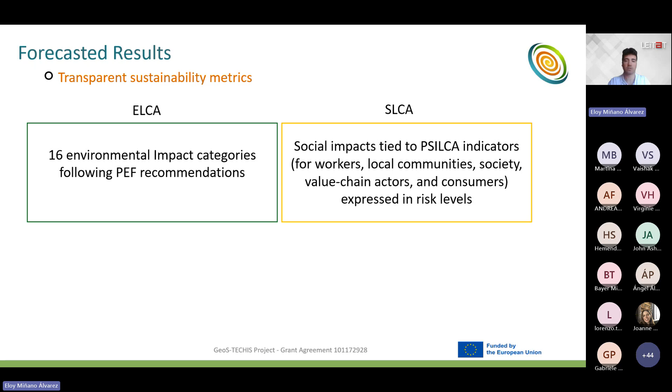Also, the electricity is electricity that comes from the grid. And for the cooling system, an example of construction can be the pools that have been constructed for cooling the system. They use tap water, and the end of life is wastewater. And the results after modeling all this with the SimaPro tool can be 16 environmental impact categories following the PEF recommendations. And in the social aspects, social impacts tied to PSILCA indicators for workers, local communities, society, value chain actors, and consumers, expressed in risk levels in the end.

And that's it. Thank you very much for listening. I've seen that some projects are also conducting this type of life cycle assessment. So if we could connect and share knowledge and information in order to improve our assessments, that would be great.

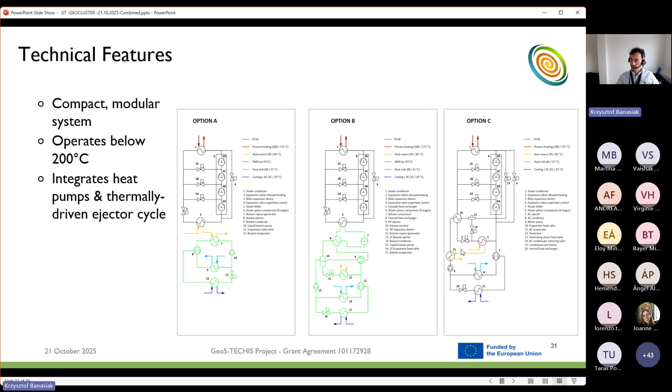In addition to the cost evaluation, we performed a kind of ranking based on many different criteria: economic, thermodynamic, technical, safety criteria, awarding pluses for aspects we believe are profitable or technically sound, or minuses for aspects that might cause problems or expenses in terms of finances. Once we calculated all those pluses and minuses, it turned out that all the systems will be challenging. But nevertheless, option A, a combination of steam-based heat pump combined with butane or propane, in other words hydrocarbon-based ejector cycle, is the solution that most likely should be followed.

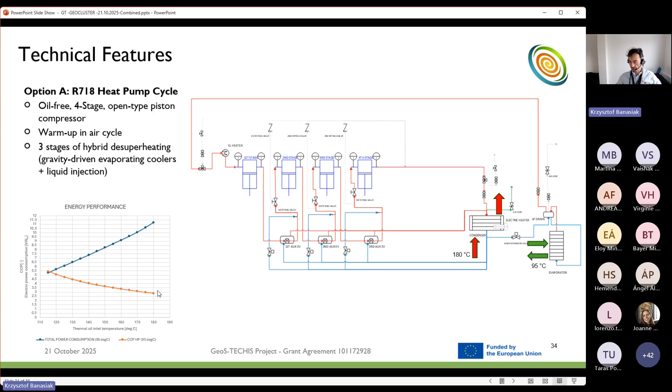When it comes to the next cycle, which is the propane refrigeration cycle, I say propane because along the way we evaluated that it's pretty much the same in terms of complexity and COP. But for our project partners, a company manufacturing hydrocarbon-based heat pumps, it's much easier to work with propane. So we said, okay, let's go for propane. It doesn't change much and brings some other benefits.

In the end, it's the propane refrigeration cycle, which is heat-driven, supported by ejectors—of course a pump and 2 ejectors. Why 2 ejectors? Because we figured out that for the given conditions, meaning 90 degrees Celsius geothermal water, producing 20 degrees Celsius utility, and taking into account ambient conditions at around 40 degrees Celsius, there's no way the whole cycle should run with only 1 compression stage in the ejector. We need 2 stages of compression, meaning the ejectors would have to be connected in series.

So what we plan to do: we truly hope that before we press the button and run, we will have the chance to test both units, both installations, in our SINTEF lab. Once we have figured out all those most likely happening tiny imperfections and refined the system, both units would be installed at the test site, which is a Kauman manufacturing place. And this is where we also want to launch the system to perform real duty operation.

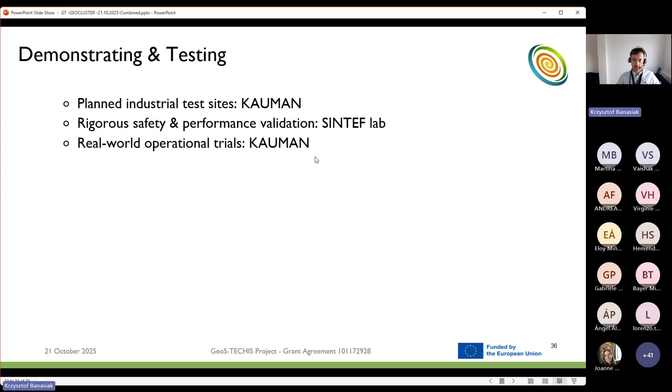That's the plan for us from a technical perspective. Thank you very much for your attention.